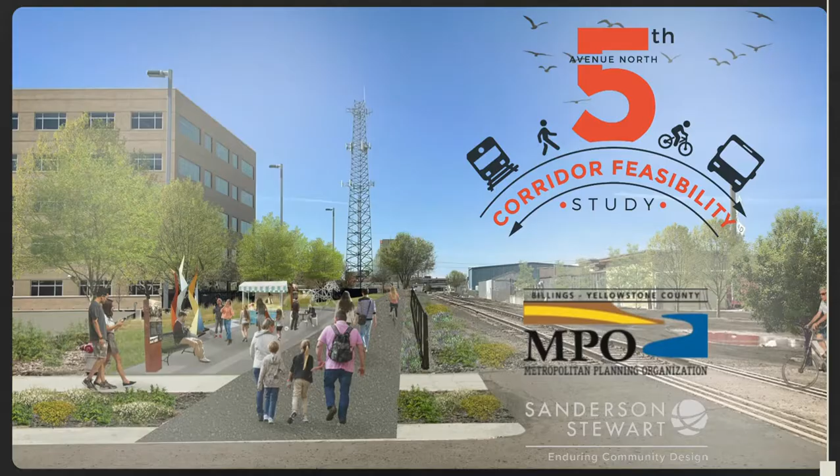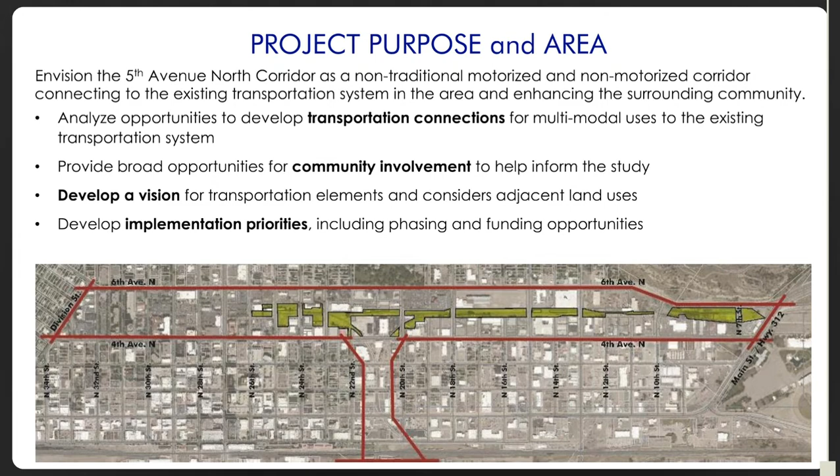The project area is the Fifth Avenue corridor from Main Street on the east to Division Street on the west. There were four overarching goals to the study: evaluate opportunities for different modes of transportation, provide opportunity for the community to inform the study, develop a vision for the corridor, and develop implementation priorities and next steps.

The study was completed in 5 phases. Throughout all the phases, a project oversight committee met monthly to evaluate the analysis and provide direction on the study. The committee was made up of city and county staff, economic development leaders, and transportation officials.

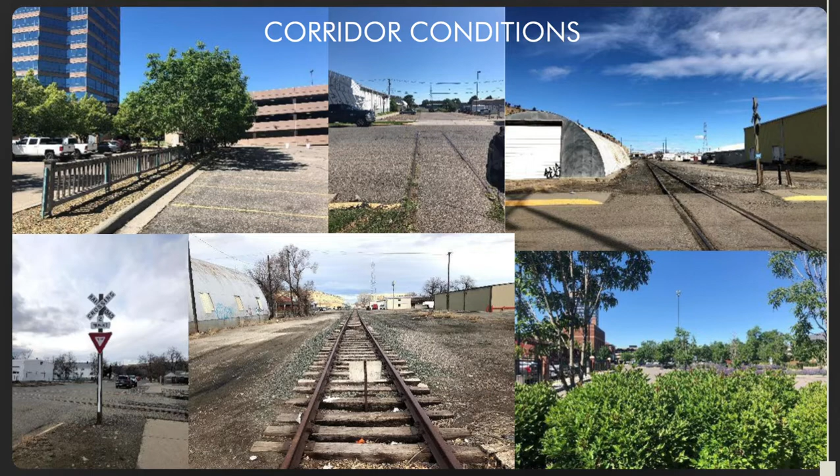In the first phase, the existing conditions of the corridor were analyzed. As seen here, the corridor is a mix of active rail line on the east to parking lots on the west. Through this analysis, it is clear that Fifth Avenue North has distinct characteristics throughout different areas of the corridor.

As part of the public outreach, we met with stakeholder groups and held a virtual open house. For both groups, we asked people to imagine what Fifth Avenue would be as an active transportation corridor. What if it would be a place for bikes and pedestrians to move, recreate, and gather? Can it be done while there's still an active rail line?

The short answer to those questions were yes. There are opportunities to create such a corridor. Key takeaways include the opportunity to create connections throughout the downtown and East Billings area and build off the railroad history to create an active corridor for a diverse set of users.

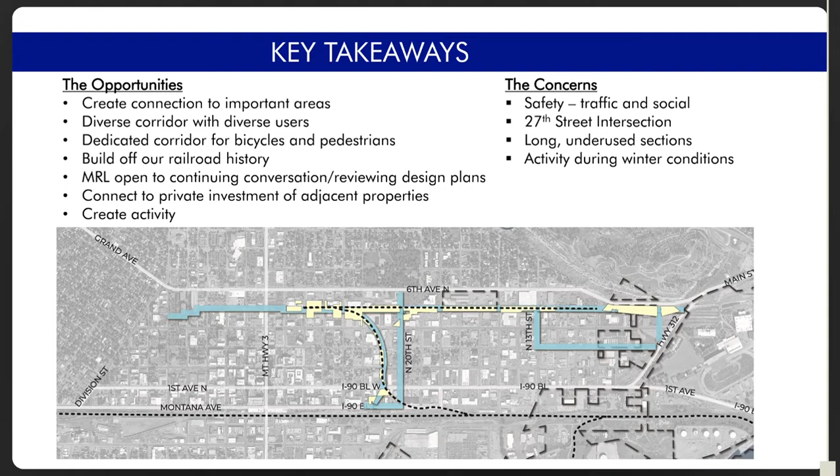Because Montana Rail Link actively uses and controls the right-of-way, they will need to be part of the continued conversation and review future designs. With the opportunities, concerns related to safety and development of a year-round active corridor were also identified.

Taking the opportunities and concerns to the Project Oversight Committee, a list of feasibility criteria were established. These 7 criteria were evaluated as part of the project. Overall, these criteria can be met with the development of the corridor. However, much of the future feasibility will be dependent upon future corridor design.

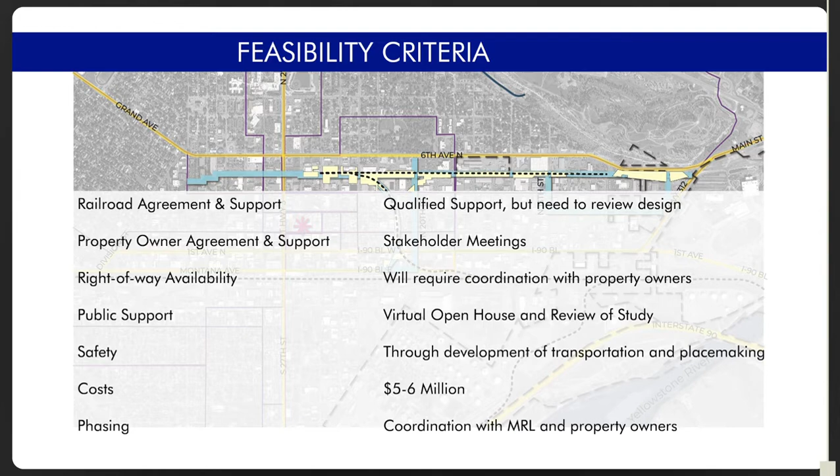The Project Oversight Committee worked to develop 5 goals for the corridor as the project moves from feasibility through design to completion. An important goal and aspect of the feasibility study is the development of the corridor as an active public space. As simply a transportation corridor, the feasibility of addressing the remaining goals becomes more difficult. Through the implementation of creating a space for people, the corridor can become an active hub of Billings.

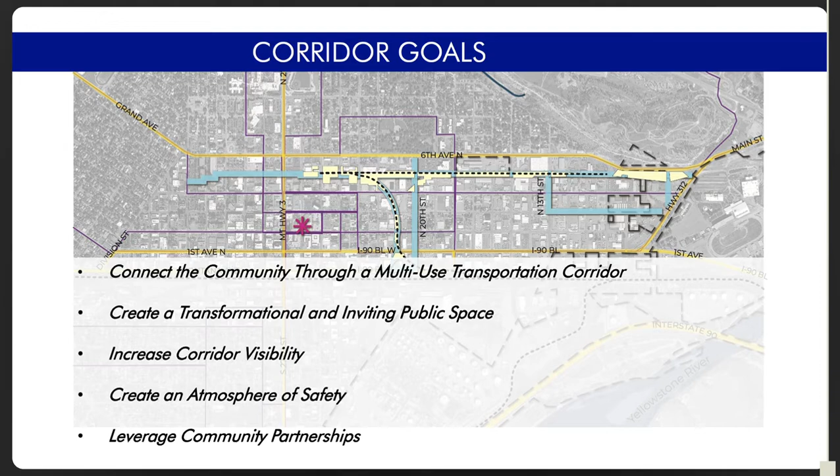A vision for the corridor was developed with 4 distinct zones that reflect the different conditions of the area. Unifying the corridor as a whole will be common transportation elements and placemaking elements. Together, these create a unified vision that can be implemented over time.

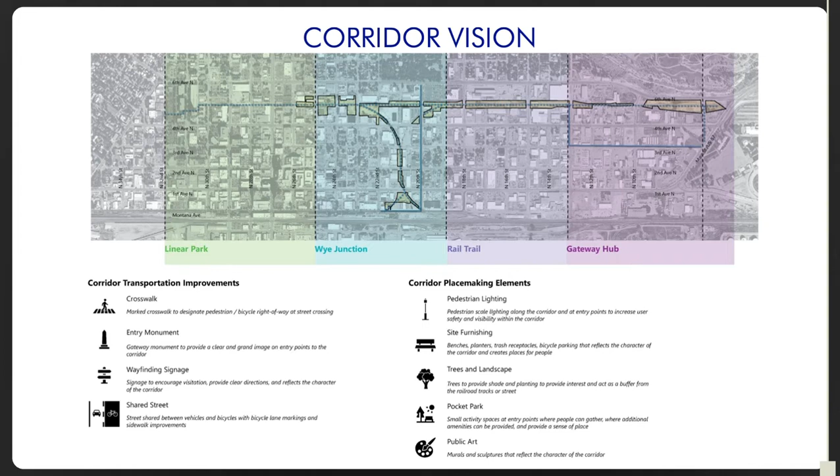The westernmost section is the linear park, which runs from the YMCA on the west to the Yellowstone Art Museum on the east. Identifying a need for a greenway through the downtown, the linear park section has the opportunity to provide transportation connections to key community institutions, as well as opportunities to expand and enhance adjacent private development.

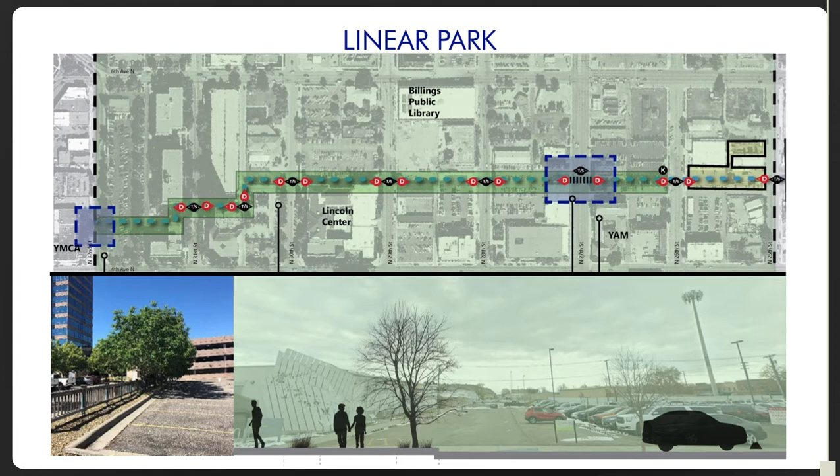The Wye junction, named for the Y shape formed by the railroad tracks, is characterized by wide right-of-way, adjacent redevelopment opportunities, anchored by several large office buildings. With connection to the North Park neighborhood and Montana Avenue to the south, the Wye junction has the opportunity to expand the corridor to adjacent neighborhoods.

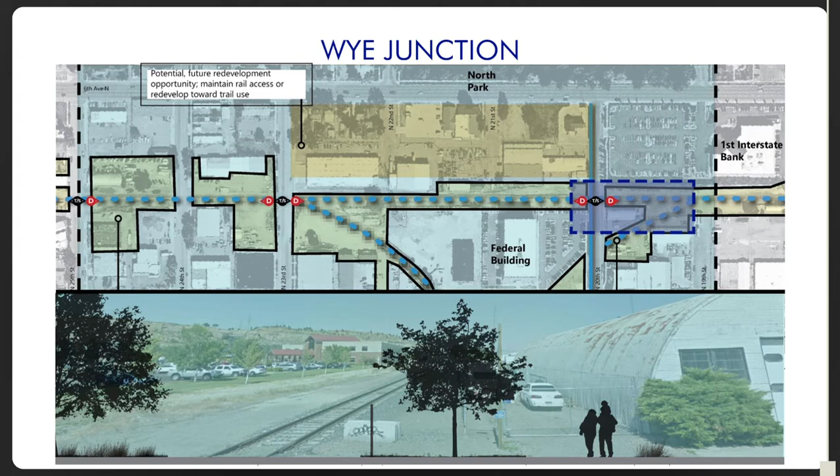With a narrow right-of-way, an alternate route along North 20th Street can provide connection between the Montana Avenue Entertainment District with the Fifth Avenue corridor.

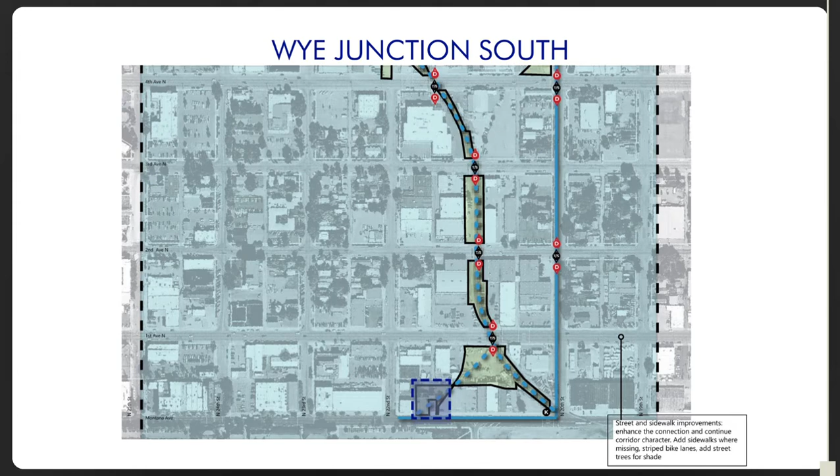The third section of the corridor is characterized by large adjacent properties with limited intersections. Through this section, improving the corridor to provide multimodal options while seeking opportunities to add placemaking opportunities as part of adjacent redevelopment is the vision for this section.

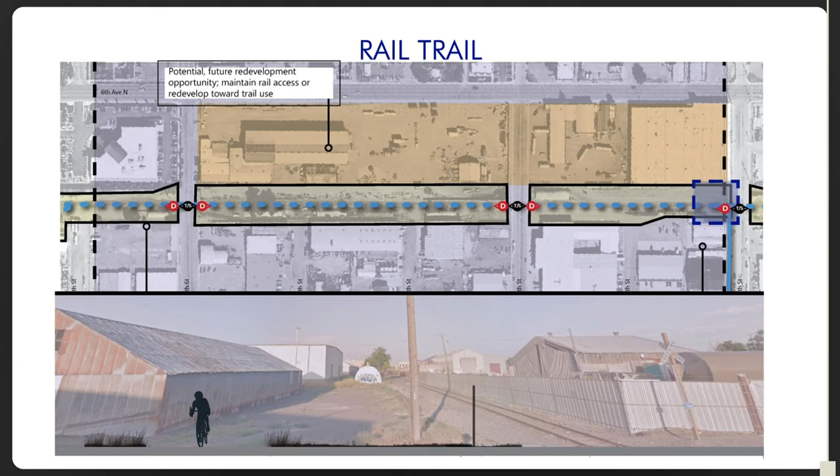The final section is the Gateway Hub and provides key connection to MetraPark. Due to limited right-of-way and active rail users, the Gateway Hub section also considers an alternate route along 3rd Avenue North. This alternate route can provide connection to MetraPark.

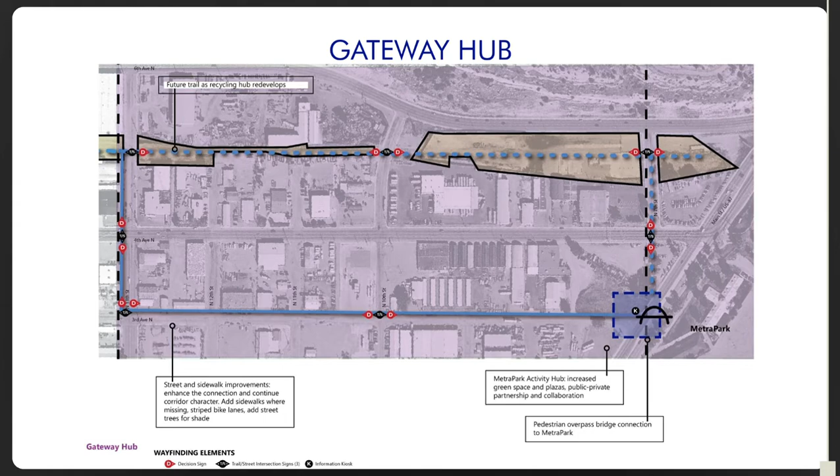While each section of the corridor has different characteristics, a multimodal trail should be incorporated into the entire length. The trail will need to incorporate design for different users and consider safe and convenient design for street crossings.

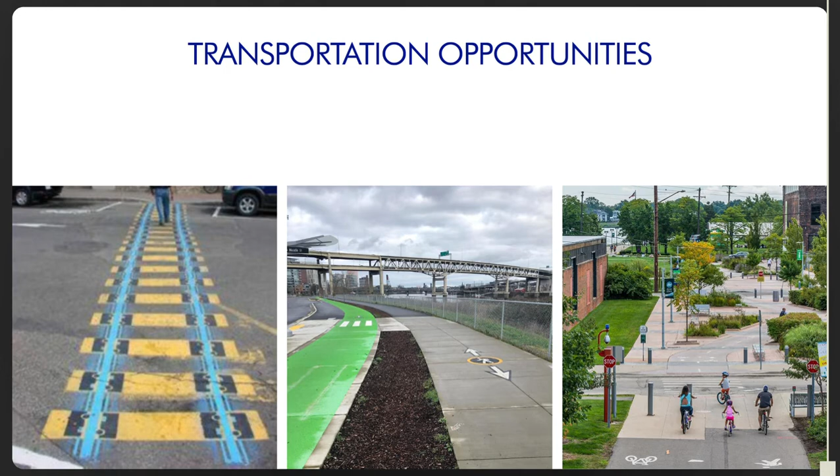Accompanying the transportation opportunities, there are opportunities to establish a sense of place within the corridor. Community members who provided comments on the vision, as well as stakeholders, reiterated the need to create a destination that is unique to Billings. Building off the railroad history, the corridor can be Billings' own rail walk.

The full document can be found on the project website and provides an opportunity to leave your comments about the study. Through the next month, the study will be reviewed by the City of Billings, Yellowstone County, and the Montana Department of Transportation.

Beyond feasibility, the next steps to fulfill the vision will be to develop design plans for the corridor and continue review with Montana Rail Link, identifying phasing and funding sources, and develop a final implementation plan. Thanks for your interest in the study, and please leave us comments on the website.